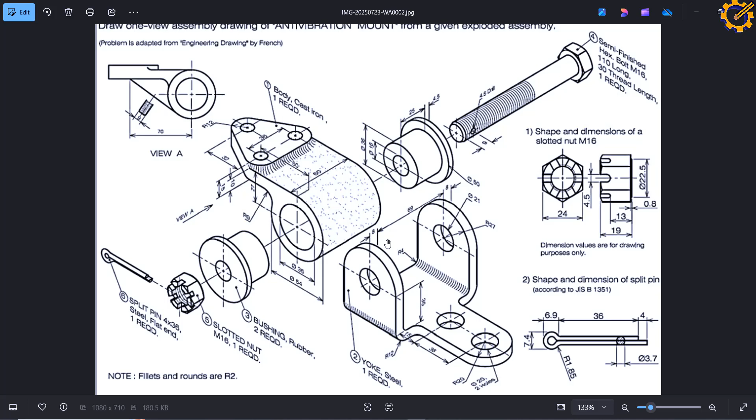Okay, this. Alright, now, one thing is this, I don't know what will actually come out in your exam, but I'm sure that if the man told you that if you can attempt any of these questions perfectly, then you are good to go for your exam. It might not actually repeat the same question, but it might give you something similar. Do you get it now?

I think I did this already, I have this on my PC already. So straightforward, the only one that's actually added here is this first component here. But I'm pretty sure this actually come out. If he's going to repeat a question, this might come out. This one is straightforward, okay.

These two might come out. This one is also straightforward. This is straightforward. This is straightforward. This is straightforward. Okay, so let's start with this. Okay, let us start with this. So I'm going to actually start from one of the cheapest components there.

Let's start from component number 4. Alright, component number 4 now. If we look at the details given to it, it says a semi-finished hexagonal bolt, M16. So M16, some of you might actually be aware of what it actually implies. So M16 actually means this threaded part. Oh sorry, I need to actually bring this out so that I can use this to illustrate.

Okay, it's incredible. So okay, so now this area, do you see the area I'm marking? Can you see it? Hello? Hello? Hello? Respond now, I beg you.

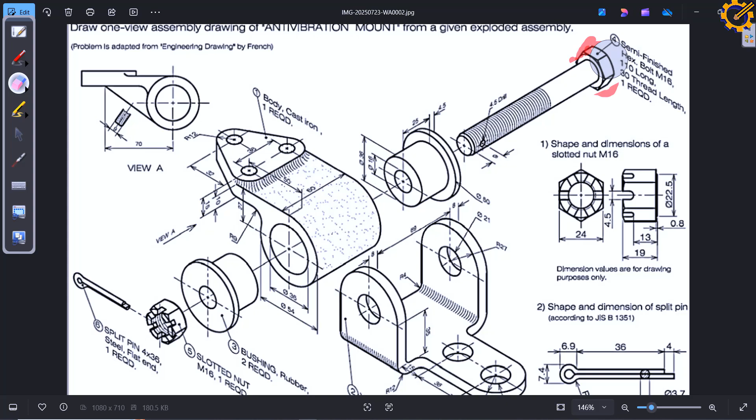So the distance from here to here is what? AC, across corner, that's the distance there. Now in this scenario, we are not given any dimension for across corner or across flat, so we just assume. What I use in this case is I add dimensions of either 10 or 14 to the initial dimension of the bolt. Now, as this one is M16, I'm going to add 10 to it. That's going to get this hexagonal head, that's going to be 26.

To do that, let me create a project file. I'm pretty sure we cannot create a project file, right? Can we create a project file? Let me create a project file for this sake.

Okay. I'm pretty sure what I'm doing on the screen, we all know how to actually get to that area from our respective laptop. All right.

So now to create that M16, whatever rating. You are aware you can pick any of the planes - you can pick the XY, you can pick the YZ, you can pick the XZ. Please, if you have any question along the way, don't hesitate to unmute and ask.

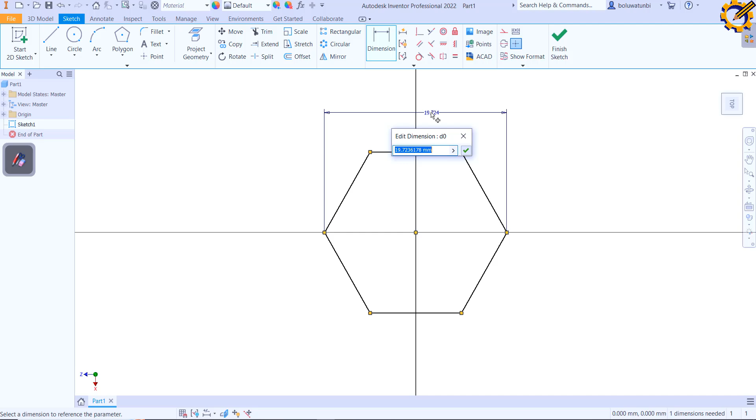So now I'm going to pick a polygon. I'm going to draw this. So M16, I am adding 10 to it - that's going to be 26 for this edge. 26, like that. And I'm going to finish my sketch. You see that?

So I'm going to extrude it. We are not given the thickness for the head also, so I'm going to just assume - I'm using 10. I'm going to click on that face, create a new sketch. Please, if you have any problem or any question, don't hesitate to ask.

Now with my extrude, I think I have a video on how to actually create this bolt, so that shouldn't be an issue. Okay, but I can continue like this. Then our M16 right there.

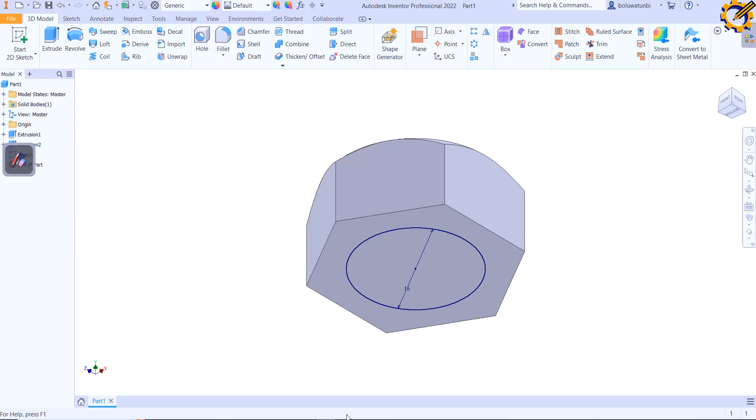So now if we look at the problem, the length is what? 110 long, from here down here, that's 110 long. I'm going to actually extrude this to 110 now. Then what? Okay, now looking at it like this, the next thing is I'm going to create that hole you are seeing.

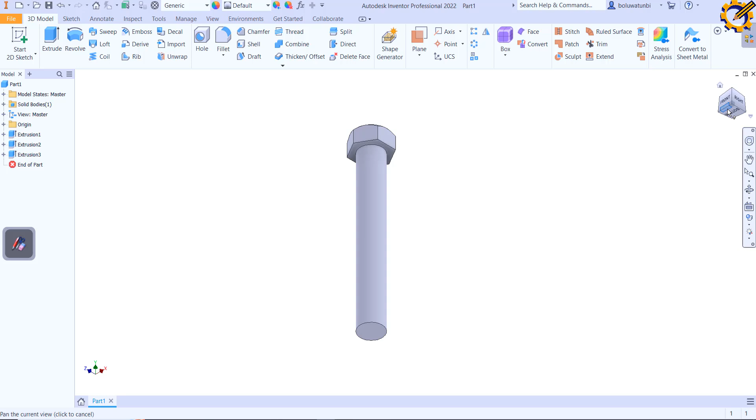You know we have a hole - this hole you are seeing here, this hole of diameter 4.5 drill. I'm going to create that hole there. Now how do I create that hole? I'm pretty sure you are aware that...

In Autodesk Inventor, I have a flat surface like this. I can click on this flat surface and create a new sketch - that is very, very possible. But on a cylindrical surface, that is not the case. If I want to create a new sketch on a cylindrical surface, I need to actually create it by using a plane, by slicing through it.

Now, coming to my origin here, I have access to several planes - you see YZ plane, XZ, and XY. So I'm going to pick either XY or YZ. Any of the two will actually give me that hole of diameter 4.5. So let me just pick this.

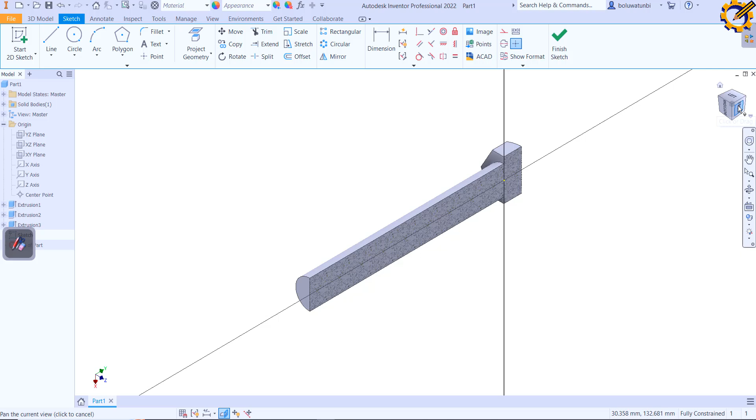So I'm going to slice it to see the inside. When you press F7 on your keyboard, it's going to slice it open, dividing it into 2 equal halves for you. You see that? That is it - I use the F7 key, the function key on your keyboard, F7.

Alright, so I'm putting a hole of 4.5. And the distance from the edge here to the middle of that hole is 9. Take note, the distance here is 9. So with my dimension, I put 9. Then I finish my sketch, finishing my sketch with my extrude.

I do this symmetric. We actually know what symmetric is, yes or no? I need answers - do we know what symmetric is? When you want to extrude, we have this first one, that's default. We have flipped, we have symmetric, we have asymmetric. So do we know the difference between symmetric and asymmetric?

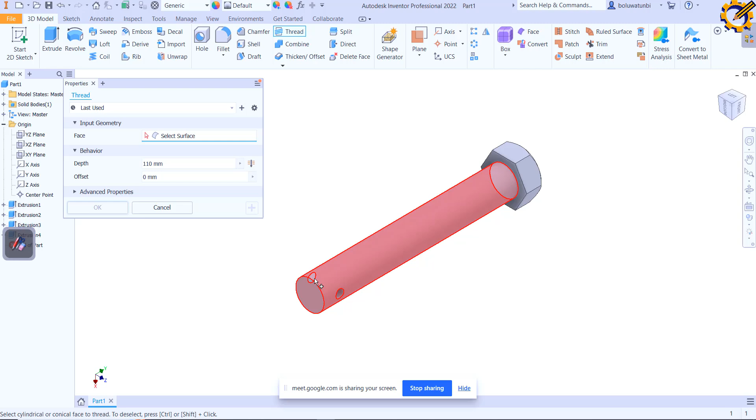So from here, all right, depth of what? 30. You see, that's it. Okay, you see that? So now, if you look at the tip of this bolt, it is chamfered a little. It is chamfered a little. Now, in some cases, you'll be given the dimension for the chamfering, and in most cases, it's usually 2. You will see 2 times 45 degree. Whenever you see 2 times 45 degree, know that is what? That's the chamfer.

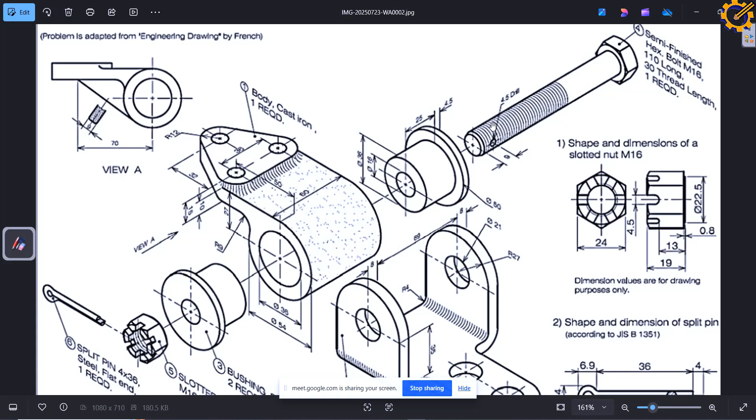So in MEG 211, the lecturer actually differentiated between a chamfer and a fillet, right? Hope you can differentiate between a chamfer and a fillet before I proceed. Can we differentiate between a chamfer and a fillet? Chamfer, fillet. Do we know the meaning? Okay, thank you very much. Then we move. So I'm going to just chamfer this at a distance of 2. Yeah, I think that's okay. Alright, so I'm going to save this as item number 4, as it is on the question,

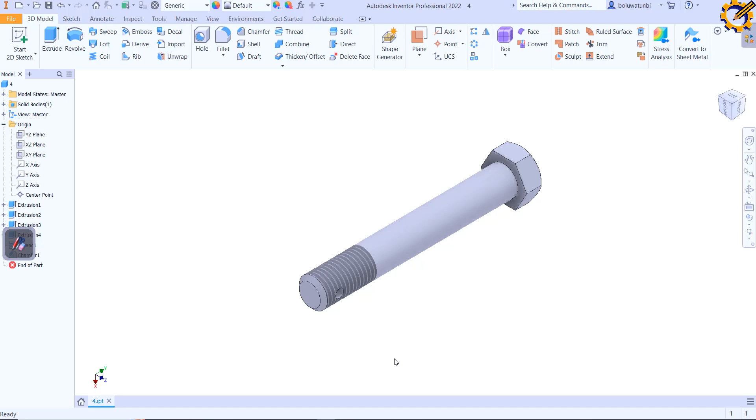So with my Control N, I have this, and I create another part drawing file.

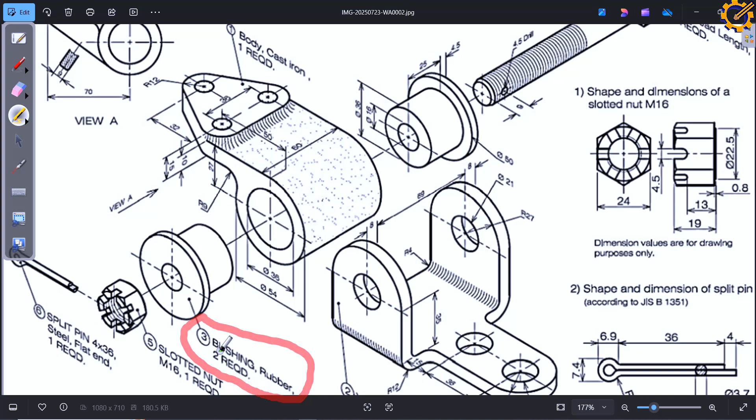So now let's produce item number 3. Now look at this item number 3. It says bush. You see, bush, and the material for this bushing is what? A rubber. And we are told that we are to have 2 pieces of this. 2 required, meaning 2 pieces of this bushing. Okay, 2 pieces of that bushing. That is it. So let's create that.

So now for this bush, we can create it using 2 means. I can create it using extrude. I can create it using revolve. Are you listening? We can create this bush using extrude and using revolve. Now looking at this bush, you are going to take note that all the shape we have on this bush is what? Is a perfect circle. So if you are doing any shape that has a perfect circle throughout, you can actually make use of extrude.

Okay, but if your shape is cylindrical but it is not a perfect circle throughout, let me look for one question like that. One moment, please. Okay, for example, now look at this particular item that the cursor of my mouse is hovering about. Now, this item is also a cylindrical shape item, but it is not perfectly cylindrical from top to bottom.

So now in this case, I can't use extrude here. I am going to use revolve. If you want to create this particular item, it is revolve we are going to use. We are going to use revolve to create this. Because if you look at the shape here, this is a tapered shape.

Tapered. Okay? Tapered. This is a tapered shape.

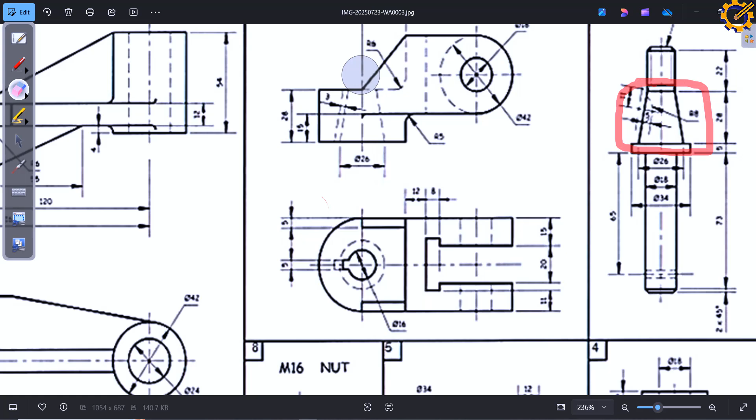So whenever you come across an object that is not a perfect circle throughout, just know that you are using revolve. And that is one of the clues to solving your problem. When you know what to use, then you are one step closer to finding a solution to whatever problem you encounter during the exam. If you are thinking it is extrude you want to use, you keep wasting time. You keep drawing, deleting, drawing, erasing, because extrude won't give you this particular object. So take note of this.

If your object is not a perfectly cylindrical object throughout, you are using what? Revolve. But if it is perfectly cylindrical all through, you can use either extrude or revolve. But if it is not perfectly cylindrical, you can only use revolve. So for this particular bush, I'm going to use the 2 methods. I'm going to use extrude. I'm going to use revolve.

Alright. Now, when it comes to Inventor, you have basic mathematics there. Just do your plus and minus. Because I might be saying this is 20, and you'll be saying, how did they come about 20? I calculate it in my head. And I'm pretty sure you are aware that Inventor can also calculate. So if you can't calculate in your head, just type it in. This plus this is going to give you the correct answer.

Alright. So let me use revolve. Sorry, let me use extrude first of all to create one of the bush. Now this bush that says 2 is required, I don't need to create it in 2 places. I only need 1. If I create 1, I can duplicate it when I want to assemble. Take note. This bush is saying I need 2, but I am only going to produce 1, then duplicate it when I want to assemble. So don't say since they wrote 2, let me produce it 2 times. You are wasting your time.

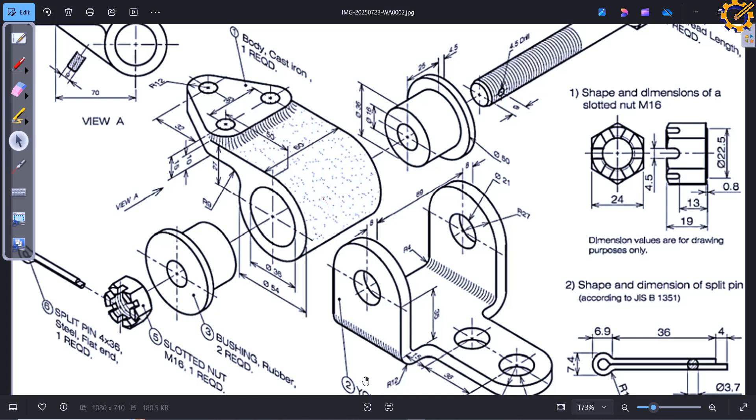So the dimension for extrude: diameter 36 here at the back, diameter 50. Then on the inside, diameter 16. 36, 16, 50. Take note, 36, 16, 50. Use any of the planes, okay?

With my circle, diameter 36 from the origin, you see, diameter 16, okay, and diameter what? Diameter 50. You see that? Then what? Finish sketch. Finishing my sketch.

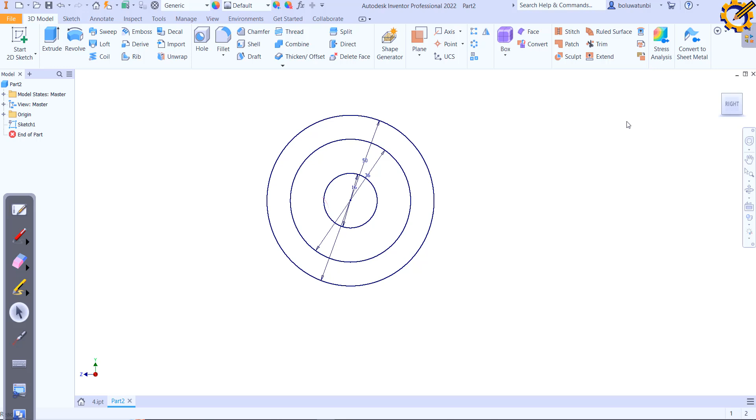Now, the reason why most of you actually find it difficult to produce objects is this. After creating your sketch, you have the sketch flat like this. If your sketch is flat like this, it is going to be hard for you to know where you are extruding to. Okay. Now, look at this area. Thank God I even remember. Look at this area. That is your view cube. So, if your view cube is giving you only 2D, that is length and breadth like this, anything you are extruding or revolving, you won't see what you are doing, and you can make mistakes.

So before you extrude or revolve, ensure that this shape here is giving you a 3-dimensional view. And how do you set it to 3-dimensional? It is quite easy. If you carry the cursor of your mouse to the edge here, to the edge at the bottom, it is going to give you 3D. Let me try this place. Now you can see that even the icon is giving me an isometric view, 3D. Unlike this one that is only giving me 2D, length and breadth. Now if I pick here also, it is giving me 3D. I have length, breadth, and height.

So take note that your view cube is in pictorial form, in 3D form, before you extrude or revolve, so that you can see whatever you are doing. Take note of that. And if you don't know how to use this view cube, if it is hard for you, you will actually need an external mouse. If you want to enjoy Inventor, you need an external mouse.

Now there's a way you can actually revolve this object here, move it about with your external mouse. So I'm using an external mouse now, a 3-button mouse. If I press down the scroll button of my mouse, that button I'm using to scroll in, scroll out, you see, I can move my object. That is pan, P-A-N. I can pan it and move it about.

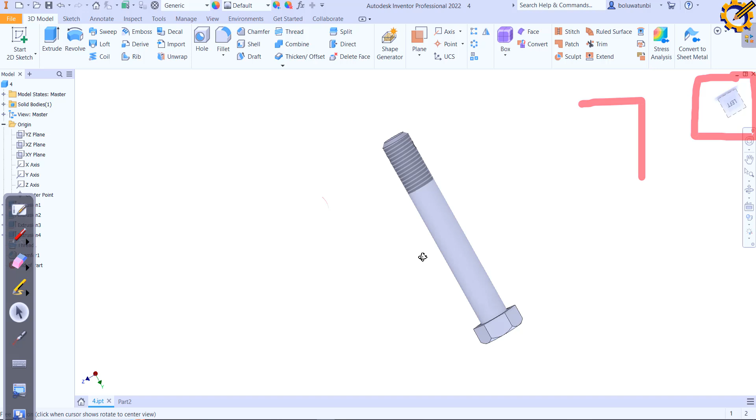Now, look at this scenario here. If I want to change the view of this particular object without using this view cube, using my mouse, all I have to do is hold my shift button. If I hold my shift button, I'm going to press down my scroll button, the scroll button that you scroll in and out like this. So press down your shift button, hold your scroll button, and see. You can also revolve your object about. You can orbit your object about.

Do you see that? You can orbit it about, because some people will say using the mouse to control this thing is difficult. So that's another way you can control this thing. Hold down your shift button and hold down the scroll button and just move your mouse.

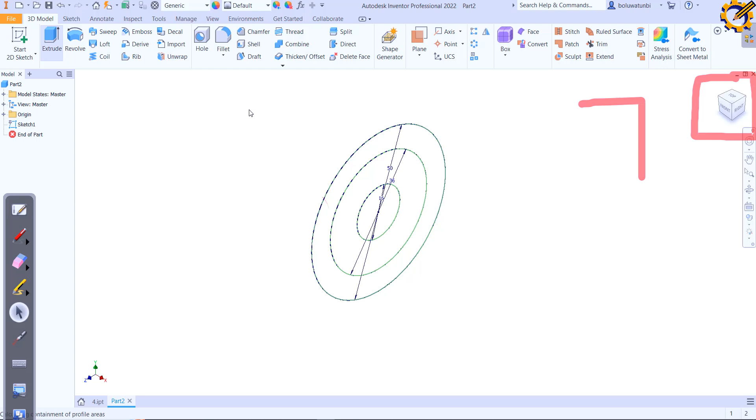Right. So back to this. I'm going to extrude this now. If we look at this object, that's diameter 36. Diameter 36 is coming from the bottom, and the dimension there is 25, and from the bottom is 4.5. 25 plus 4.5, that's 29.5. So this one, 29.5.

Okay, I click the plus right here. And that bottom, that diameter 50, is at a thickness of 4.5. This at 4.5. Okay, so I have it. You can see, with my shift button held down and my scroll button pressed down, I can orbit this object and look at it from different views. That is it.

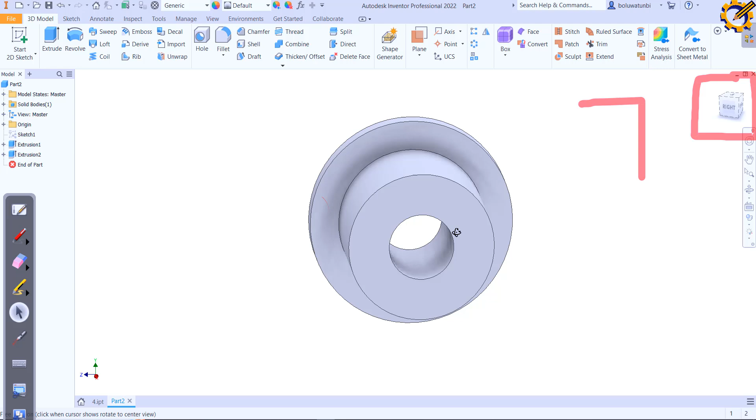Fantastic, isn't it? So that's my item number what? Item number 3. Let me name it as 3A. Okay, now I'm going to use revolve for the same object. So if I'm to use revolve, Control N on my keyboard.

Control N. Okay, then what? I have this interface. Now, if I'm going to use revolve for this object, take note of this. If you want to use revolve, you need to actually produce that object's half orthographic view. Half orthographic view. What do I mean by that? Look at this object. So you know the orthographic of this object lying down is going to actually look like this.

If I take this direction as my front view, I will be having it like this. Right? And this hole on the inside goes all through, so it will be hidden like this. Am I correct? Before I proceed, am I correct?

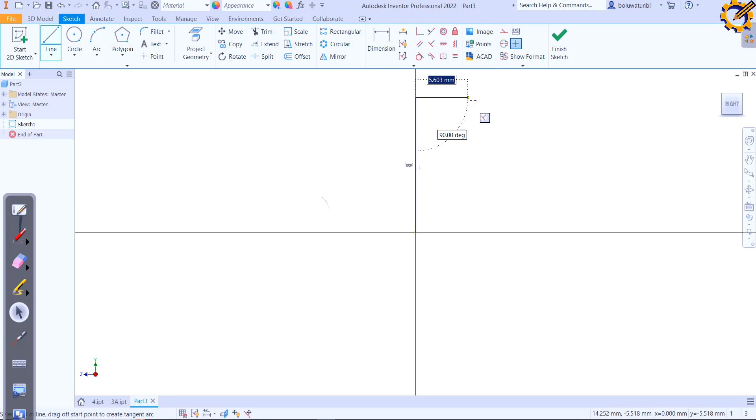Alright, so now that particular view, to generate it, I'm going to stand it up like this. Instead of making it lie down, I'm going to do it this way. Like this and like this. That's half. You know that's half of that object now, Abby. They have it like this. Yeah, that's half of that object. So I'm producing half.

So with that half, I'm going to add my dimension. We are told that this is diameter 50. Now half of diameter 50 is what? 25. Enter. This place, the height is what? 4.5. My height is going to be complete. It's only the diameter I'm going to divide into 2.

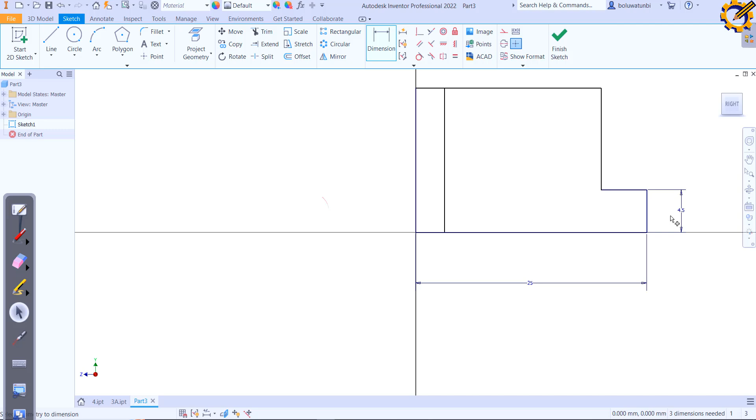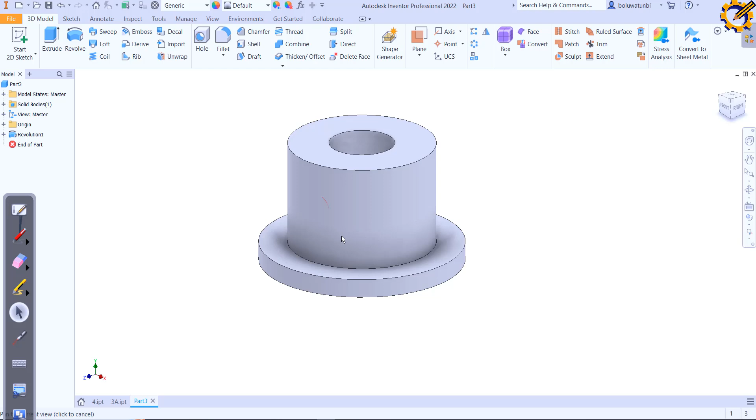Okay, that place is 25. This place is 25. This place will be 18, and this place is 16. This is going to be 8, and that's it. With this now, I finish my sketch. Finishing my sketch, I pick revolve. With my revolve, I pick this as my axis, then I have the same object. You can see, like plantain chips, still the same object but using a different technique.

So take note of what I said earlier on. If your object is a perfect circle, you can make use of extrude. But if it is a cylindrical object but it is not a perfect circle, you are using revolve. You can use revolve for both perfect and imperfect circles. You can only use extrude for a perfect circle. So take note of that. Alright, so I don't need to save this.

So Control N, I have another working page. Let's create this yoke. Look at this yoke. If I want to do it from my end, there is a way I can create this yoke using just one sketch. Should I show you how to use just one sketch to generate this yoke? I'm going to just sketch once. I won't create another sketch. Should we do it that way, or should we use multiple sketches? I need an option.

One sketch. Okay, now if I'm going to use one sketch, I'm going to actually view it from this direction. If I view it from this direction with one sketch, this is what I'm going to be having. I'll be having this orthographically like this. Okay, let me use this line. I'll be having this, like this, and this circle here like this, isn't it?

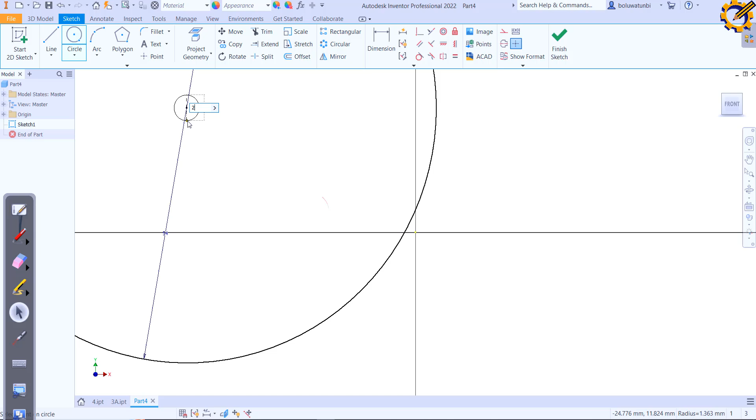The outside here, radius 27. That's diameter 54, 54 and 21. 54, 21. Okay, then I have this like this.

Okay, now look at this. You will notice that the vertical line here that I circled is not straight. So whenever you come across something like that, you don't need to delete your line. Just calm down, relax. That line is not straight because it is not perpendicular. You can see there's no perpendicular constraint here. So what am I going to do? I'm going to pick my perpendicular constraint, click on it, and click this and this. Here you see, that was it.

Chip like what? Like plantain chips.

Okay, so I'm going to extend this line all the way to the bottom here. Like that. Okay, then look at the dimension here, everybody. From this edge here to the center of this circle is 15. From the center of this circle to the center of this circle is 36, if I'm not mistaken. Now the other end, this place to this place is going to be 20, because the diameter of this area is 40. So half of 40 is going to be 20.

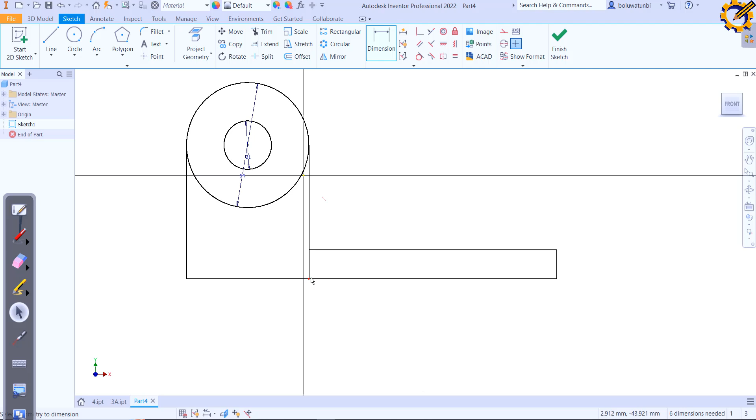So which means 15 plus 36 plus 20 in that order. So let me use Inventor to calculate it. If you are going to use one sketch, you just need to be calculative. Okay, 15, 36 and 20 from here to here. 15 plus 36 plus 20, enter. So we have that over there.

So I'm going to actually get that mark 15 itself first. So now from here to here is 15, enter. From here to here is 36, enter. You see that? Now the hole at the center of this 15 is diameter 20. That will be radius 10. So I'm going to pick my offset and offset this line at a distance of 10. Enter. And this one also, distance of 10. Enter.

By the time I revolve it, this will be my reference point. I will revolve this like this to give me a perfect circle here, one. This will be my reference point also; I will revolve this one to give me a second perfect circle, two. That's what I'm going to do when I want to turn it to 3D. I'm going to revolve it about that axis to get those two holes at the middle there.

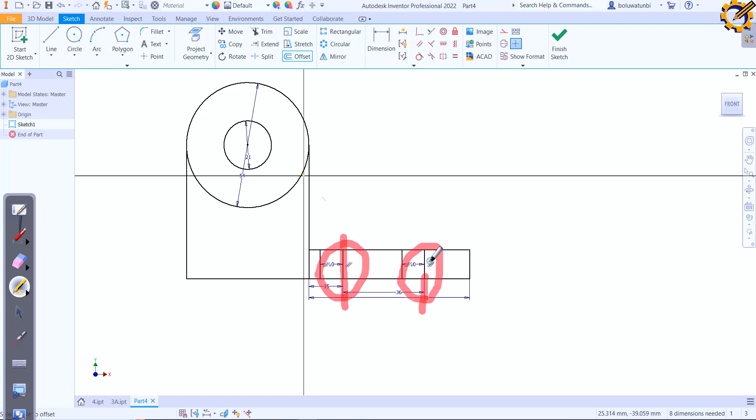Take note of that. Okay, so the height from the center down there is 35 and the thickness is 8. 35, 8.

Here to here is 35, and here to here is 8. Alright.

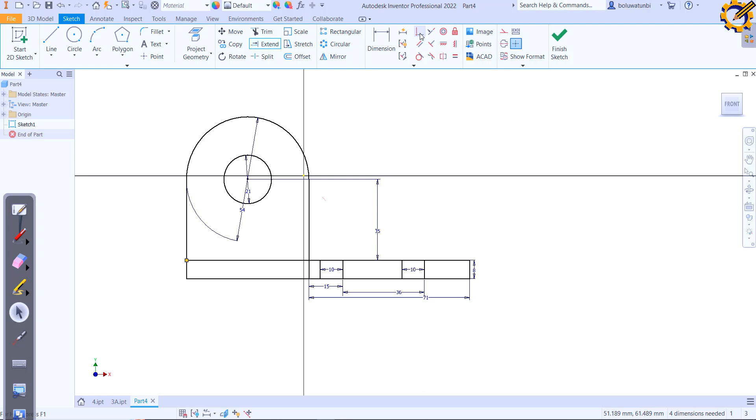So I think I can trim this also. Yes, and I can extend this one all the way to the bottom there. I think I'm okay like that. So I'm going to actually move this thing to my origin, from here to our origin right there like that. So I think I'm good to go.

Let me check the dimension. Am I good to go? Good to go, good to go, sir. Yeah, we are good to go. So I'm going to finish my sketch. Finishing my sketch, I'm having this like this. So take note, everybody, take note.

So with my extrude, okay, 80, is this 69 or 89? This is 69. So from the inside here to the inside here is 69. You now have thickness of 8, thickness of 8. So that will be 69 plus 16.

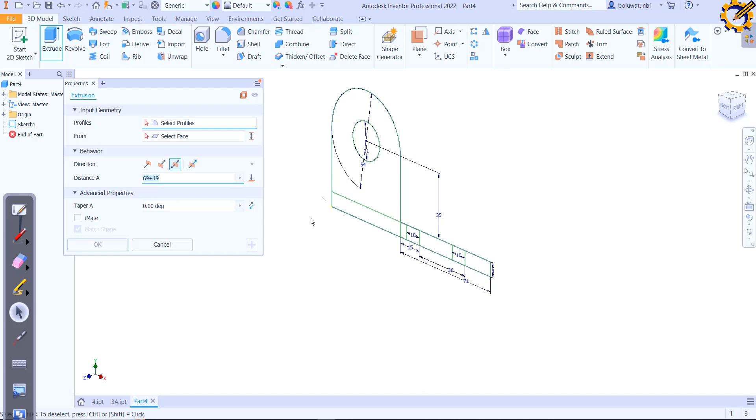69 plus 16, and I'm going to use symmetric for this place and this place. Do you see that? For that and that. I'm going to use my plus. I'm going to pick only this place now, at 69. I'm going to use symmetric, then cut. Do you see that?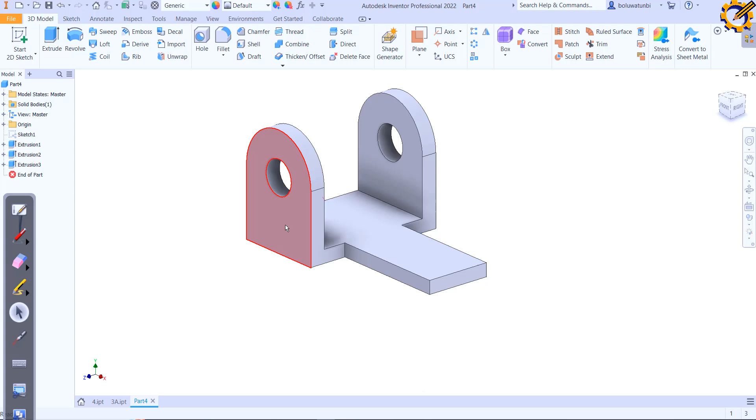Do you see that? Clicking on my object, showing my dimension, showing my sketch. Now I'm going to come here like this so that I don't make mistake. Now I'm going to pick my Revolve. I'm going to revolve that shape, the first shape I did earlier on.

So let me turn it to 3D so that I can see. This first shape I did here, I'm going to pick that, select my axis about this axis here, using Cut. You see that? Then plus again, I'm going to pick this shape, my axis about this area with Cut. You see that?

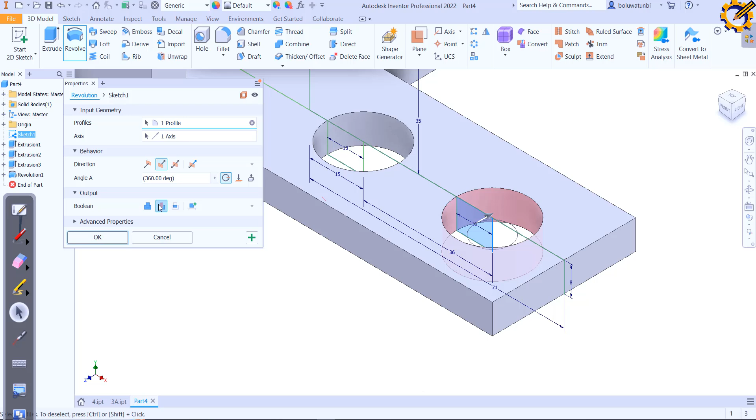Okay. So I can hide those dimensions. With my fillet at radius of 20, I have this and this. Perfecto. Alright, I think this needs to be 4. Let me confirm. Yeah, the inside here, radius 4. The outside here, radius 12.

Take note, so inside here, 4 and 4. Then outside here, that's 12. That's going to be this, and this, and okay. So we have our object.

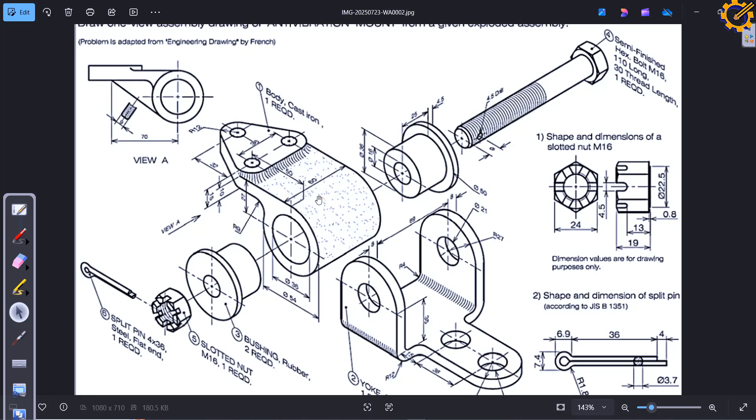Yes, if you take it from the plan, it is going to give you a lot of stress. So the best bet for this kind of object is from the front view or end view, your choice actually. Okay, now this item number 1, I'm going to consider it from front view, from this particular view here, this direction. Yeah, because that is the direction that is giving me this fine shape here, and I'm going to correct the rest from the plan later on. Okay, so I'm going to produce it from that direction first of all. Alright, so take note of this.

Each of these objects can be produced using several views. Don't say because I produced this one from the front view, you must produce yours from the front view too. You can go with the plan. That is why the lecturer will tell you that all of you can't think the same way.

Let me correct this notion of a thing. If you copy, the man will know. Even if you have only one computer and 3, 4, or 5 of us use that same computer, if we did not copy, the man won't have any issue with you.

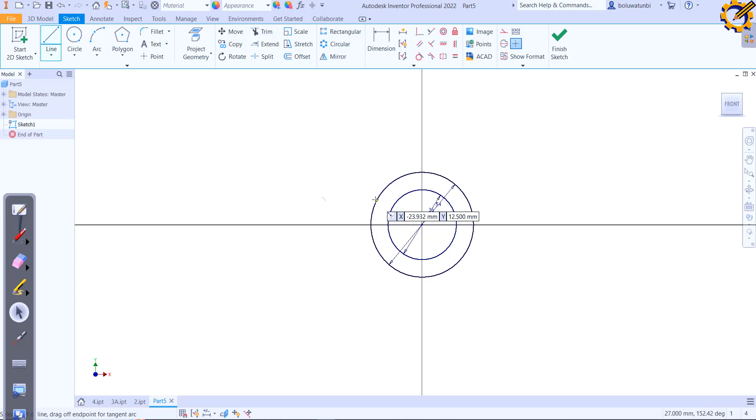You won't have a problem at all. Take note of that. So I'm going to actually include that right here, somewhere here like this. So with my dimension now.

The thickness of this end from here to here is 15. While this inner place is 10. 15 and 10. This place is 15, this place is 10. Okay, like that. Note.

Sorry, buy MTN everywhere you go. So you have network issue.

Ndo, yeah, Ndo is sorry in Igbo language. So I learned that from Imo State. Okay.

Continuing. So from the midpoint, from the center here, to the middle of this first hole here. Take note, the distance here is 50. Take note of that. Now from the middle of this hole here to the middle of this hole here, the distance is 32. Take note of that. Now what is the distance from this edge here to the center of this hole here? You are told that the radius from the center of this hole to this place is 12. So which means distance from here to here is 12. That's the meaning.

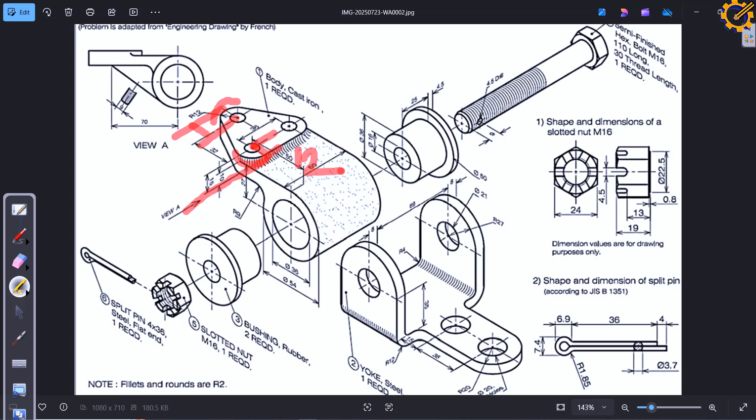Okay, now from the middle, I'm going to do some calculation again. So from here to this middle here is 12. Take note. Now from here to the back here, you know you are not given, I need to get it myself. But I know that from this middle, if this place is 12, then this place is also 12. That's it. This place is also 12. So from this middle also backward here is also 12. So which means 12 plus 32 plus 12. That's 32 plus 24. That's what I'm going to actually use here.

So the distance from here all the way here is 12 plus 32 plus 12. That is 32 plus 24. That is 56, if I'm correct. Yeah, I think I'm correct. That is 56. The distance from that place to that back there is 56. Let me erase all of this. 56. So with my dimension, I put 56. Enter. Come. With that, I finish sketch. Yeah, I finish sketch. Let me finish my sketch. Now.

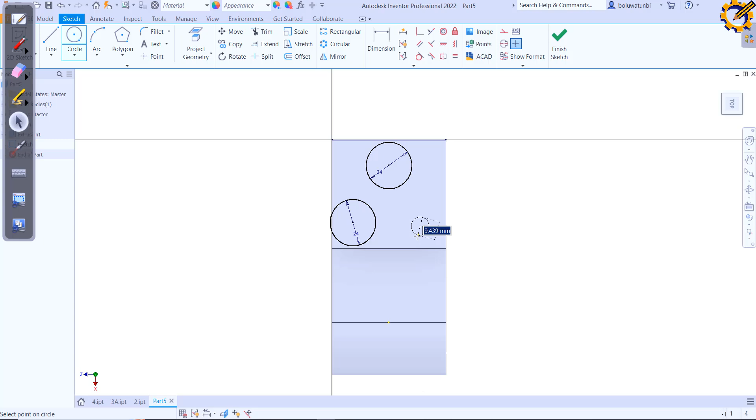Enter. Now I'm going to click on project geometry. I'm going to click on this area so that this area can be airtight. So with my tangential constraint, I click on this circle and this edge. You see, this circle and this bottom, this circle and this edge. Okay, this circle and this edge, this circle and this edge here. You see that? So with my line, I draw this.

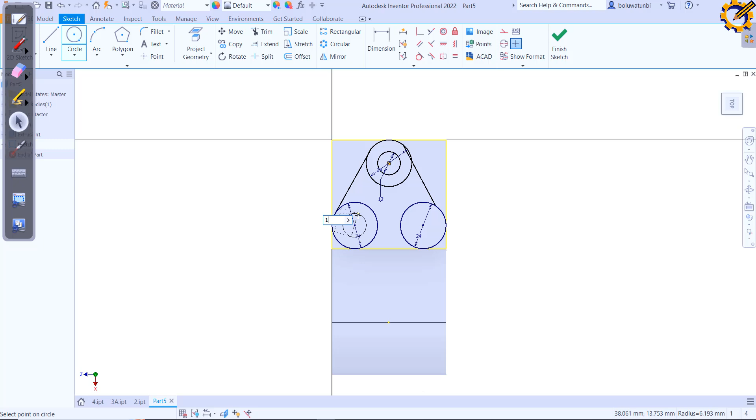Okay, and I think we have a circle on the inside, circle of radius. Okay, that will be, we are not given, so I'm going to assume it is diameter 12. Since we are not given, I'm going to assume diameter 12, enter, diameter 12, enter, and diameter 12, enter.

You see that? So what else? I'm going to use my tangential constraint also. This circle and this line, this circle and this line, okay, already exist. This line and this circle, this line and this circle. Do you see that? So I can finish my sketch now. So finishing my sketch with my extrude.

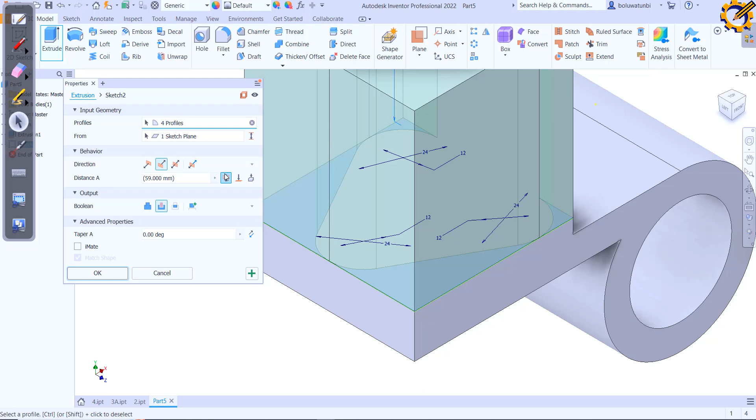Okay, that is it. Now take note, there is space here. Do you see that? And this space shouldn't be there. So there is a way you can make this space disappear. How do we do it? It is quite cheap. So I will click on this surface here and create sketch.

Creating my sketch now, I'm going to click on project geometry. With the project geometry, I click on this surface. Alright, I come here, I click on this surface likewise. Then I right click. OK. Do you see that? So with that, I'm going to come to my model, extrude. I'm going to click on this surface and this surface. I'm going to click on next.

Okay. You can see everything is clean, like Maekll. Clean like Maekll, fresh like fresh yoke, cheap like plantain chips.

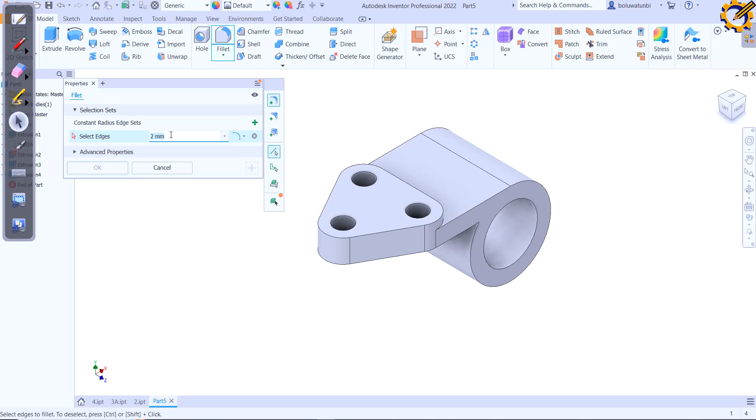Okay. So radius 9 right there. Radius what for this place here? Not given. So I'm going to assume for that area. So fillet of radius 9 first. Radius 9. So let me assume this place is radius 5, since the height there is this thing. Yeah, that's it. So I think I'm correct.

So can you see now? That's it. Cheap like plantain chips. Easy as A, B, C. That is it. Straightforward. Okay. If you have questions, ask your question.

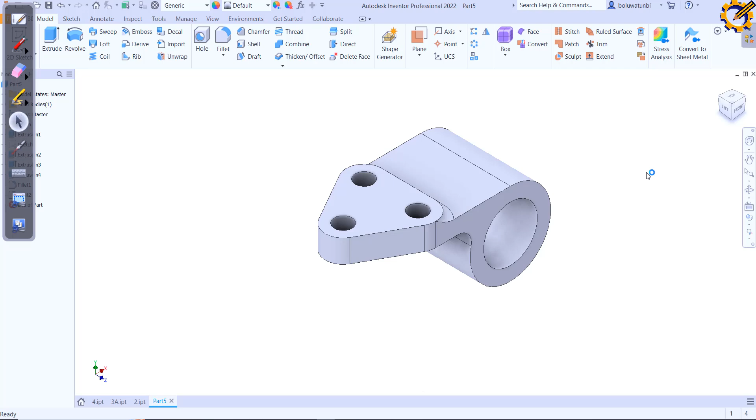So this is component number 1. Enter. So what else do we have? Okay, we have this thing, and we have this nut. I think I should be able to pick this nut over there. But this pin, did I see this pin? Okay, I can't find this pin there. So let me just create something similar so that I won't waste my time. Which one should I do?

Okay, let me do this. Control N. Yeah, like this. So I'm having this line here. Like this. So diameter 7.4, diameter 3.7, divided by 2. Okay, the fillet there, radius 1.85.

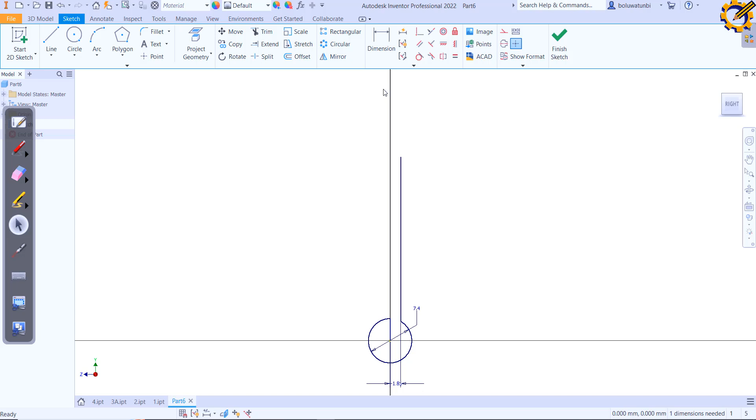It's not having it. Okay, let me draw this to this right there. Let me trim this. Let me see if my 1.85 will work. 1.85. Okay, I think I can do this. Let me get the height. The height of that pin is 36. Let me do 40.

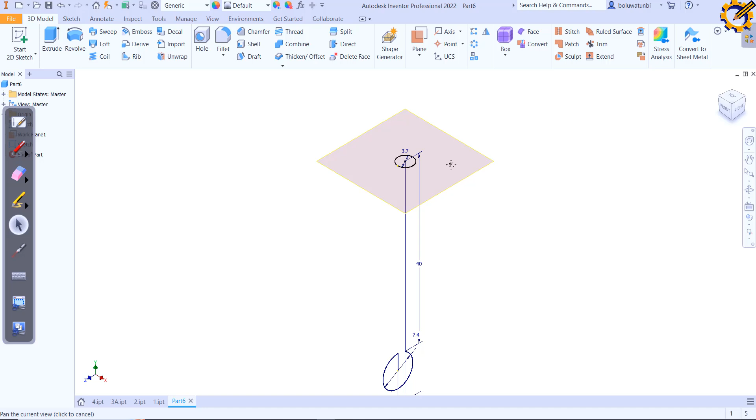Finish sketch. I'm going to click on plane. Click on the top of this and this again. So I'm going to create a sketch there like that. So a circle, diameter 3.7 if I'm not mistaken. Yeah, diameter 3.7. So I'm going to use sweep, following that path. Then okay.

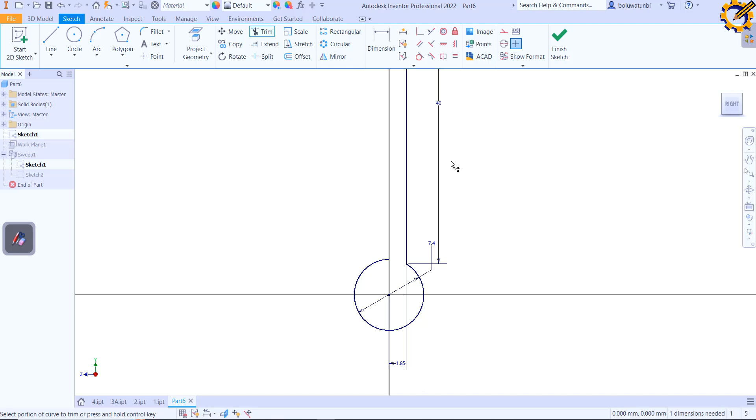So do you understand what I did just now? I beg, if you have question, ask. This will be item 6. Okay, so let us assemble. I'm going to assemble now. Standard mm.iam, then create. Alright.

I don't know what's wrong with my system. Why is it lagging? It's now doing like Simbi. How is it shaking? Chimpy, chimpy, chimpy.

Okay, place. I'm going to carry everything. Put on the inside here. Don't forget, I'm going to click on this bush. Ctrl C and Ctrl V. You see, I've duplicated that bush like that. Do you see that? Take note of that. Now, so my bush is going to enter.

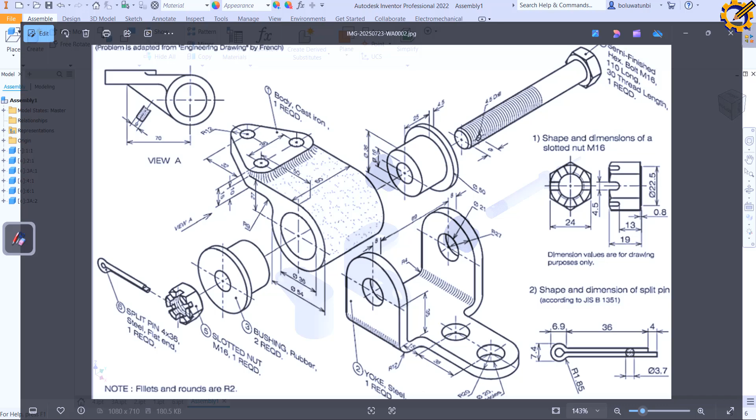You see, the first bush we enter here like this. If you look at that distance, this bush we enter this place. This one we enter this place. Then this bolt we enter all the way coming to the outside here. Do you see that? Now, before that bolt enters, this bush, this area we key in. After that, this area we go inside. After that, this one we now enter from the outside here like this.

Do you see that? We enter from the outside here. As it is, we enter from that area like that. Okay.

All right. Okay, we are given the details of this nut. So let us create this nut then. I never knew we were given its full details like this. Let us not pick it, let us create it. Guys, I didn't even see it before. Wow. Since we are given details for it, let us create.

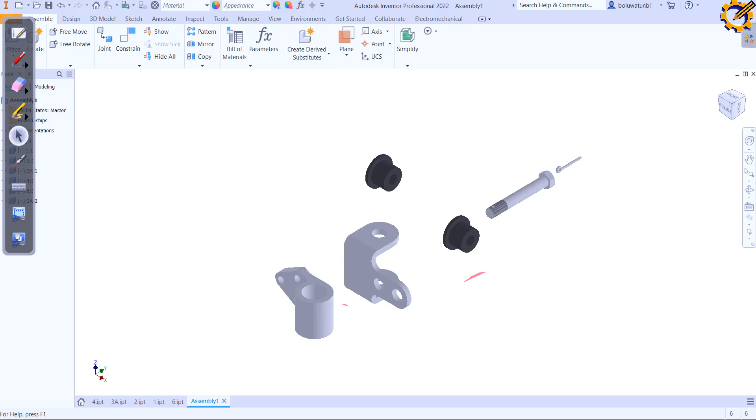Hey, screen not being shared. Jesus Christ. I'm sharing now. If that person is saying screen not being shared, it's your network. The screen is being shared. Let me stop and reshare again. Okay, I'm sharing my screen again.

So I said we should create that nut. Since we are giving full details, Control N. Okay, with Control N, start. So diameter 22.5. Okay. 0.819. So I'm going to use the same thing I used for that edge.

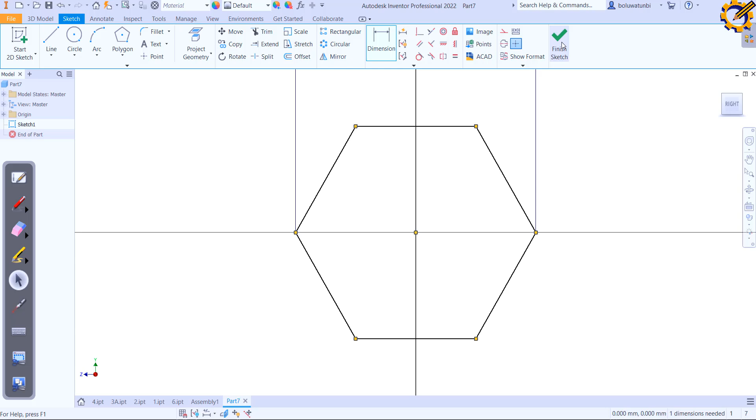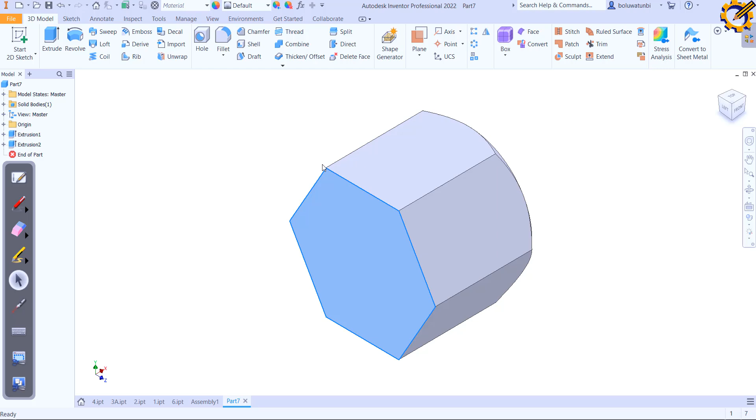Across flats, 26, 19. Okay, like that, if I'm not mistaken. Yes, it's going to be one side this time around. With my extrude, okay, right here, diameter 16 and diameter 22.5.

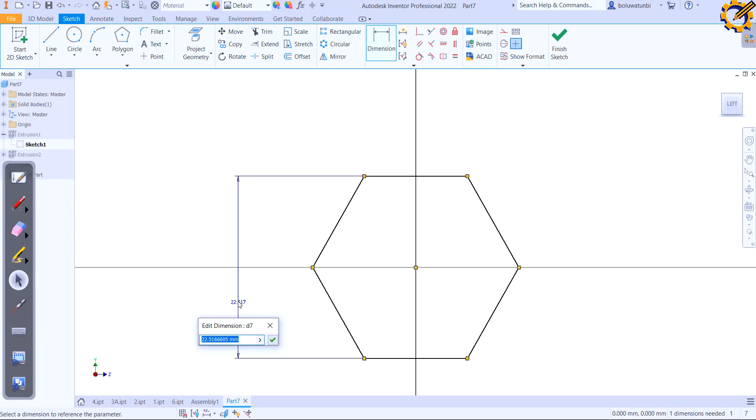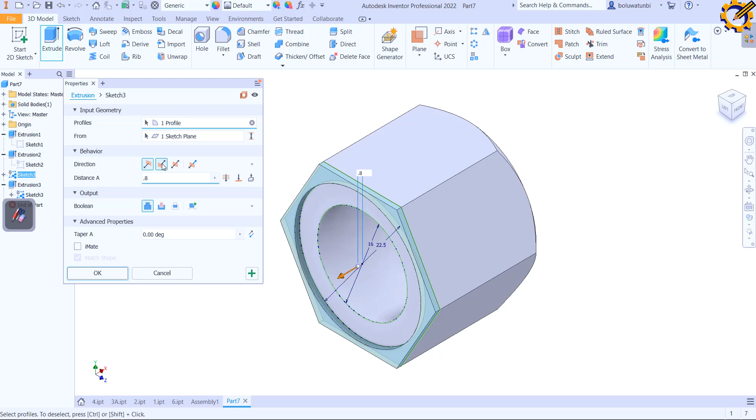Across flat 24. So let me delete this. I'm editing this, across flats is 24. Okay, extrude all through, then 0.8. I need to project geometry of this face. 0.8, like that. Yeah, like that.

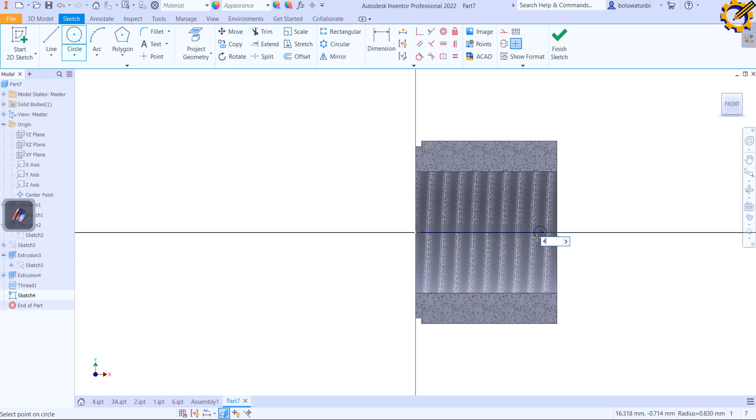Okay, and I'm going to use this plane with my F7, like that. Diameter 4.5. If that is diameter 4.5, 13, 4.5 divided by 2 is going to be 2.25 plus 13. That is this, 2.25 plus 13, like that.

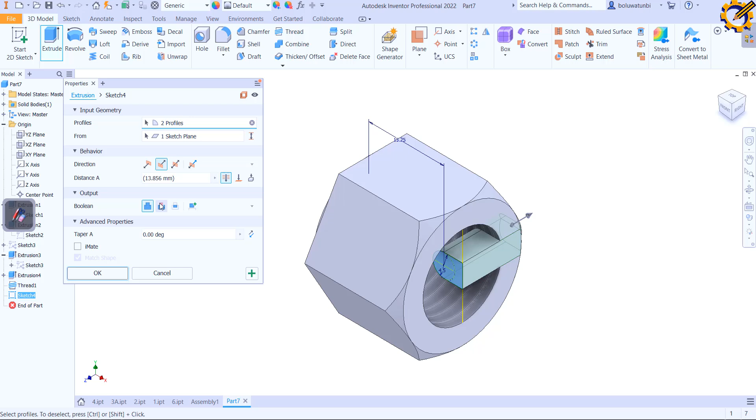And this one is going to come here like this. 1, 2, like that. Then finish sketch. So with my extrude, I can pick this. I can do it like this. Through. Okay. So do you see this? Yeah, it looks good. I'm going to duplicate it now.

Oh, I think I've made a mistake. It should fall on the flat surface. All my work is rubbish. I'm doing the same thing but on a different face entirely. Let me check it. Okay, this is a flat surface. Yeah, it should be this plane, not the other way around. This flat plane.

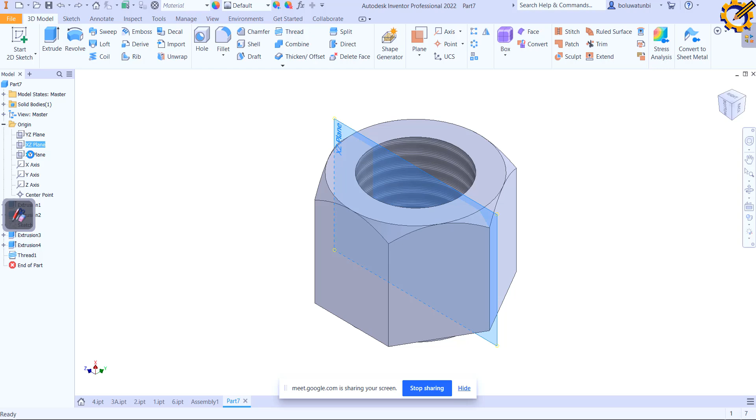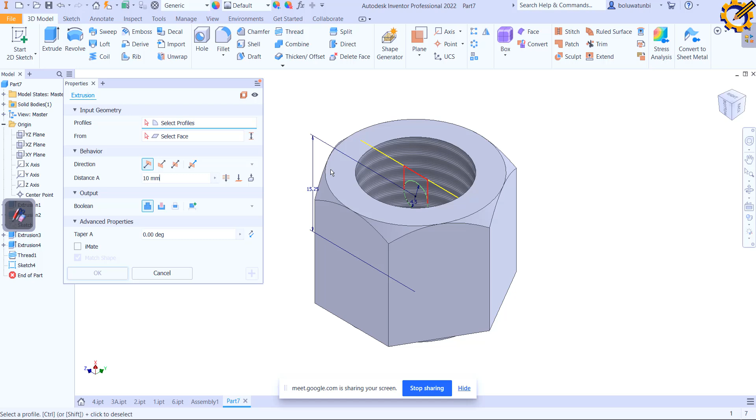F7. 4.5, plus 2.25. 13 plus 2.25. Extrude, yes. Okay, so we are having it in how many sides? 1, 2, 3, 4, 5, 6. It is falling in 6 sides. So I'm going to use my circular pattern.

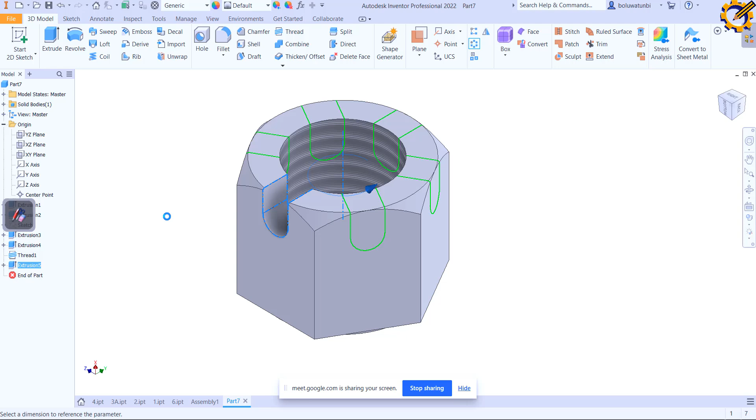I'm going to pick this. I'm going to pick rotational axis. I'm going to pick this 6. And I have my object right there. You see, that is it. Control S. Let me name this as part 5. So back to my assembly right here. I can place that part 5 also.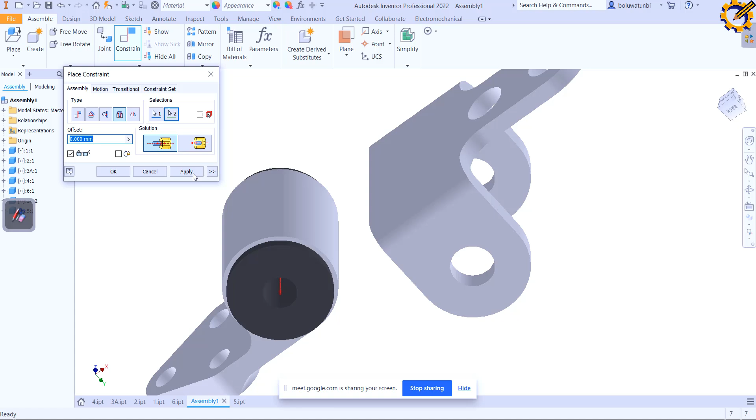Okay. Now I'm going to use insert. With insert, I insert this to this. So you must learn how to use that shift and that scroll button to orbit your object. It's going to make it much faster. This to this, apply. So I'm going to ground this. Grounded. So with it grounded like that, I can have this like this. Maybe it's somewhere here like this. Apply.

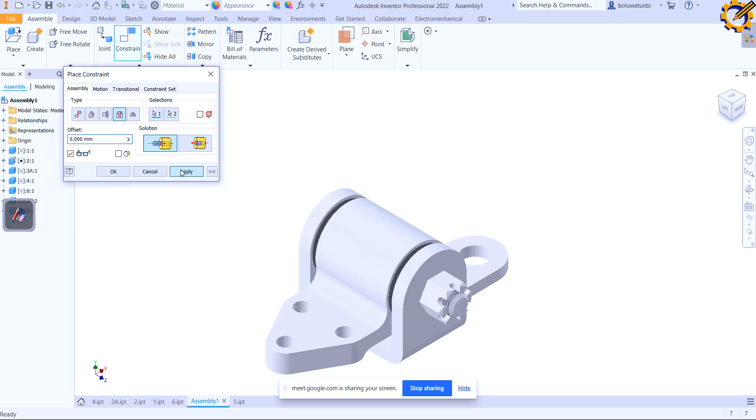You know, this one like this. Apply. Now the hole I created here, where is it? I can't find it. Yeah, that hole of 6 is what I'm looking for. I'm coming. Hope I haven't made a mistake. 19, 13. Okay.

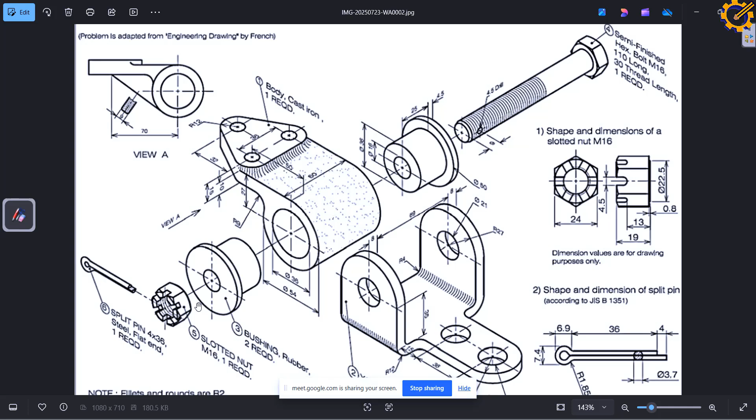I don't think that's the nut I'm going to use there. Are you still with me? Are we still seeing what I'm doing? 19, it should be this particular nut. Let me reduce the height of this one to 10. Yeah.

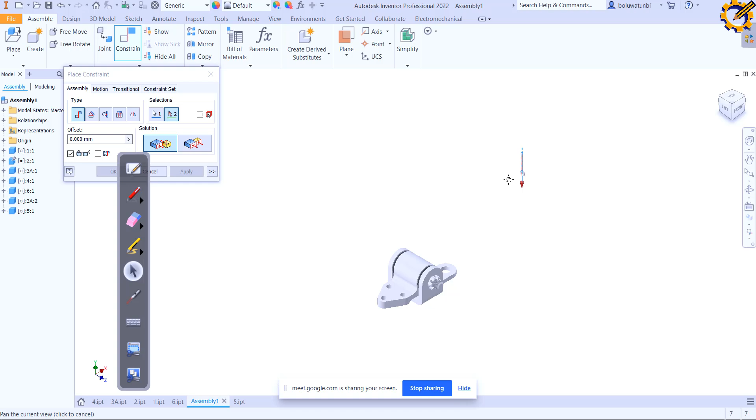Okay, yeah, it worked out this way. So with my, yes, I picked that for this like this. Okay, so with that I can swing my object like this.

So that's just it. That is our object, like that. Chip like what? Like plantain chips. So that is our object in that order. That's our object. So that is the end of this particular one.

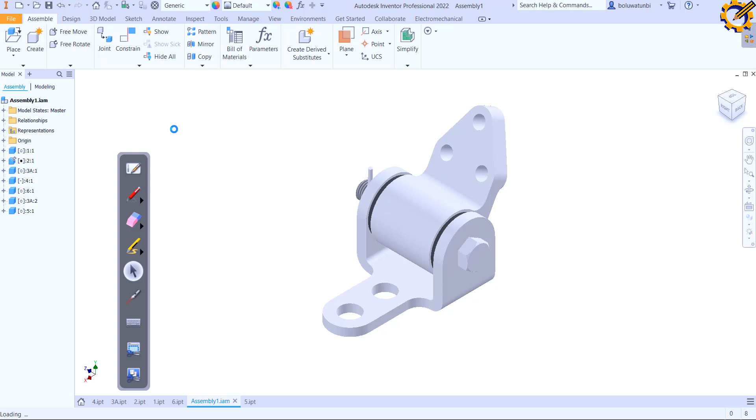Okay, the reason why it's like that is because of the way I actually positioned it. 1.5, slightly bigger. 1.2, very bigger. This one is okay like this. Like this. Okay, so there is nothing much there. So it's straightforward. I want hidden line to show.

Okay, and that's it. Chip like what? Like plantain chips. Easy as what? A, B, C. You can put your dimension in. So you should be able to do that one on your own.

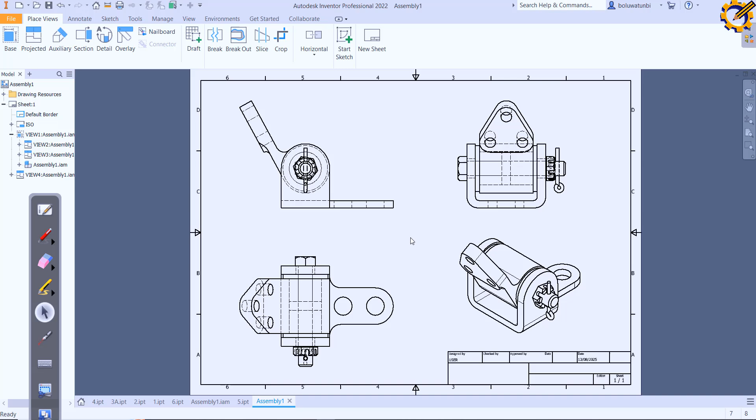Sectioning. Okay, let me show you sectioning then. I can do sectioning here also. Yeah. Let me create a new sheet. So let us assume I want to section one of the parts. Let's say part 1, like this part 1, open. So let me do it on scale of 1:1.

You see now. So section, if you have to do section, best bet, show this object. Now I'm going to show this object from the plan like this. Okay. Then what? Click on my section line. My section line, I click on this area. You see, I can now pick the midpoint of that object like this. So this one is full sectioning. This one I did now is just full sectioning.

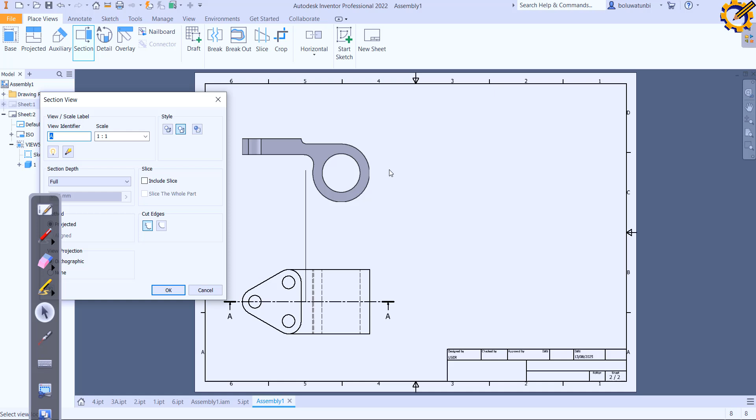So I can do several types of sectioning. So it's your choice. So let me show you this same object. I can section it in another way. Okay. So the purpose of sectioning is to see those areas that are on the inside that you can't see on the outside. That's one of the purposes of sectioning. Let me show you another style of sectioning using that same object, but from another perspective entirely.

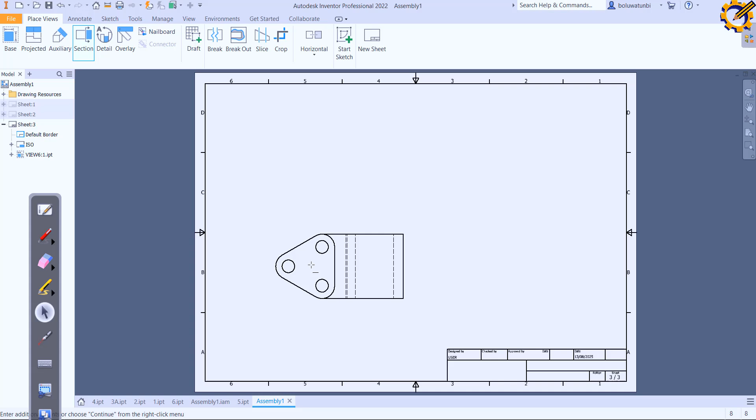Okay. So on 1:1. Like this. So sectioning. Look at this now. I can come down like this and go like this and go like this. You know, this one is half sectioning. I only sectioned this part here. You see, I only sectioned this part here. Do you see that now? So you can do several types of sectioning.

Now, for those who were asking for this thing during that time, auxiliary. So now I can do auxiliary view for this particular object because I have a slant area on my plan. So with this slant area on my plan, I can generate auxiliary view. I will just press auxiliary, click on this face, and you see, it will give me an auxiliary view. So to generate auxiliary is not that hard. It is straightforward.

So just click on the slant area, and you generate your auxiliary view. You see that? So you can generate auxiliary view from different perspectives. So that's it. That's just it.